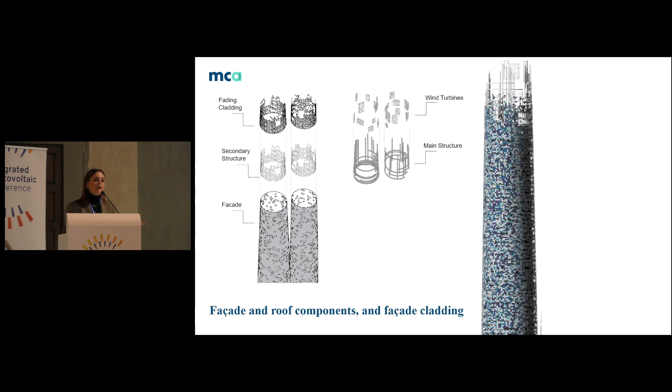And another important aspect of this particular shape of the building is that it also gives us the possibility to avoid dark areas inside the building, and also increases the performance.

This is another image where we can see also the relation with the surrounding. When we design skyscrapers and high-rise buildings, one of the main topics is related to how we can dialogue with the surrounding, with the urban space.

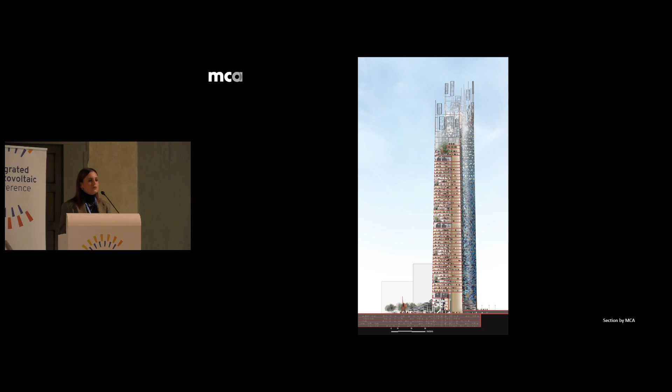This is one more detailed picture where there is also this canopy made by the same pixel as the facade, which acts as a shading device in this case, and also serves as a link between the external existing space and the indoor space of the building. So it becomes a sort of buffer zone of the building.

Moving to another place, here we are in Algeria. This is also the result of an international competition: the Post and Telecommunication Authority headquarters. We know that Algiers is a Mediterranean city facing the sea, with long summers that due to climate change are becoming even longer, and mild winters with high values of relative humidity. So the main challenge was how to control the light and the heat in the building.

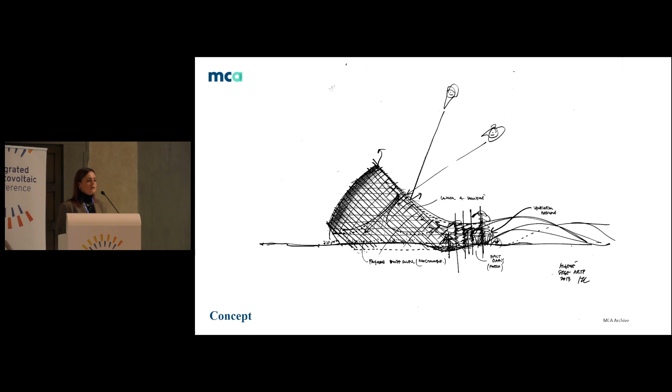So this building is a sort of dune shell, because we have this kind of shell that covers all the internal space like a mashrabiya, something very common in Islamic tradition. So there is every time a bit of a link between modernity and tradition.

The geometrical generation of this shape - when we think about the project, this is the first idea, the sketch we do during the creativity phase, but then we have to realize and make it buildable. So the building blends tradition and modernity, starting with the shape that comes from the pointed arch of Mediterranean architecture on one side, and the cutting is also related to the sun path of this latitude and place.

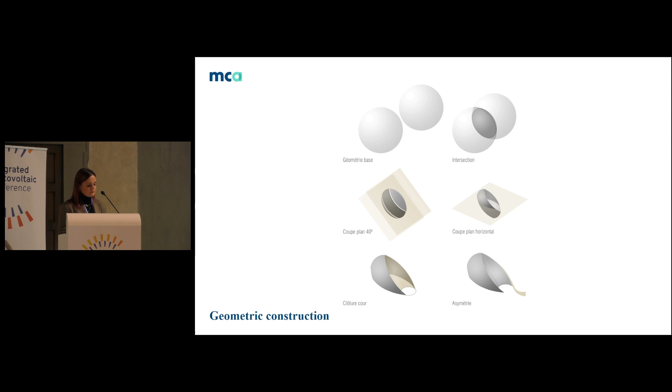In this building, the relation between architecture and technology is very important, because the entire south facade consists of a series of photovoltaic panels that not only produce energy inside the building, but also help shade the huge atrium space. We have the conference hall and offices here, so this is an important aspect.

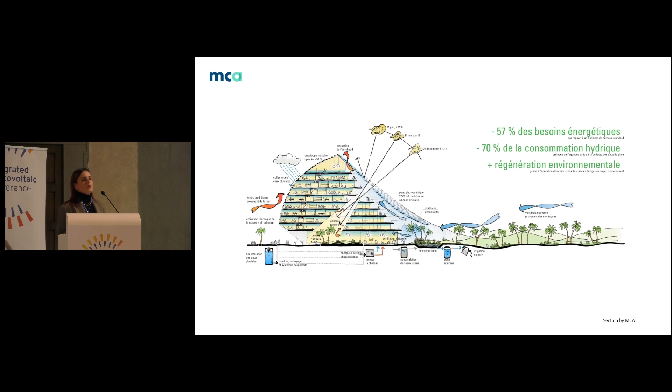Thanks to the presence of the canon lumiere, the light channel in between the building, we can allow the winter sun to come inside and also have natural light in a filtered way on the opposite side. This is an image of the main atrium where the light comes from the opposite side, so the diffuse light of this space is on the north side of the building.

This is another tool we use during the design phase: the real scale model. It's an important tool, not just software, because we are architects and we have to work with them every time. This is an important value, and since the beginning, 30 years ago, the architect worked with scale models, and now in the office we have a space with 3 people working on models - an important part of our work.

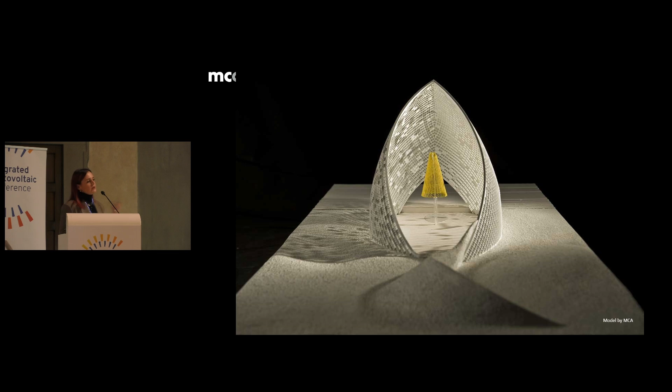In this case it was particularly important to study the relation between the shell and the light channel that comes from the south facade to the north part of the building. This is then the transposition inside the software, to really understand the relation of the indoor space and how this kind of element works inside the building.

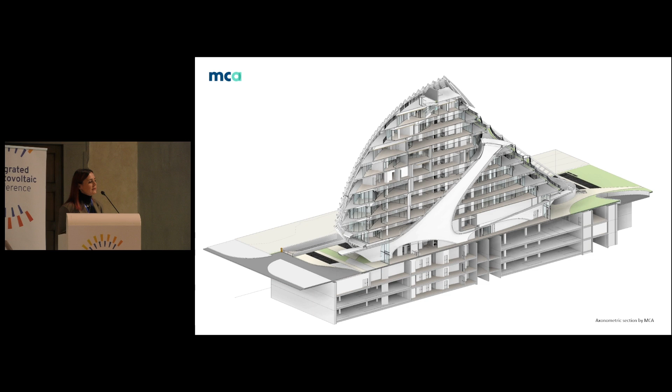This is an image of the main entrance with the huge canopy that helps protect from wind and sand in this particular part of the building. This is the last image at the end, as a result of our design.

Moving to another place, we are in Ferrara, a small city in the north of Italy, and this was the headquarters for the Regional Agency for Prevention, Environment and Energy. The request from the client was to create a sort of manifesto of their work.

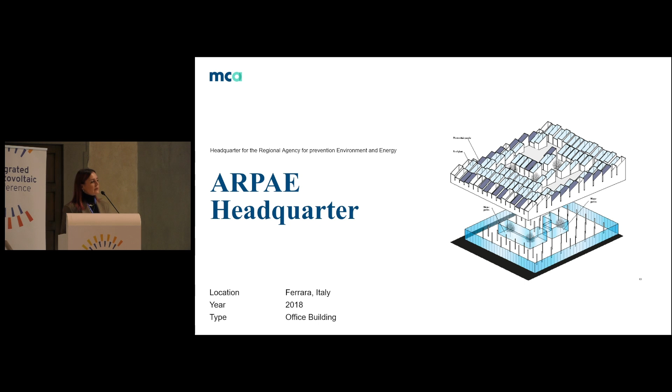It's an office building, and the concept in this case comes from a very strong inspiration told in the book by architect Mario Cucinella, 'The Future is a Journey to the Past,' which tells the story of 10 journeys made by the architect himself to different places in the world to discover vernacular architecture and understand the lesson from the past for our future.

In particular, the shape of the project is evocative of the wind chimneys of Hyderabad. Of course, we are not in Pakistan, we are just outside the city of Ferrara, but the different climate conditions between the two main seasons are very strong - a hot and humid summer and a very cold and damp winter. The main effective strategy in this kind of climate is natural ventilation, so this is the link between the two architectures: the climate condition.

Our building's roofing consists of 112 chimneys that work for different reasons: controlling light penetration inside the building, since it's an office that needs particular light conditions; improving natural ventilation as a starting point; and also producing energy for the whole building.

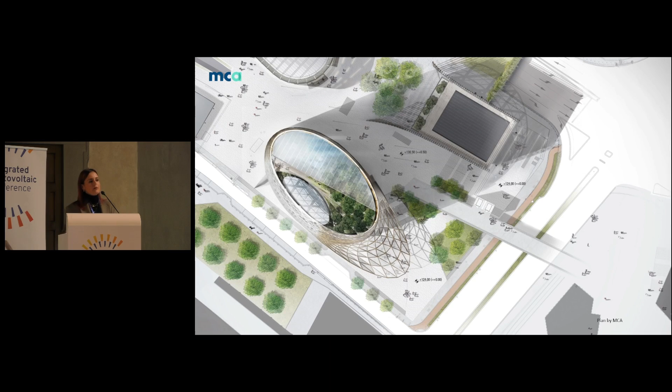So before we think about anything else, our approach is every time the same. Even if the technology and tools are evolving, before we start thinking about the active systems inside the building, we think about how to create a form that performs. So this is really the challenge for our work.

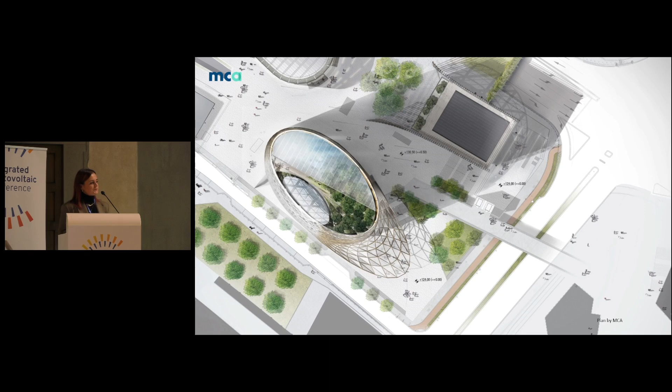In the later stage of design, we decided to put all the offices on the northern side of the building, to ensure the best quality view to the park, and also to maximize the diffuse light, which is the best for an office building.

Then, on the south side, we decided to have an empty space, but that became really an energy opportunity for this kind of tower. So this was the first step.

So this inclination is due to the urban planning constraint, but we decided to use it like an opportunity, because this is also the best inclination for the PV panels, and so for the production of energy. We said, okay, it's perfect for us - we didn't want a planar rooftop, so we used this constraint like an opportunity for the building.

So this is the main part of the building. It is not the office, but the atrium. It's a 75-meter high atrium that works like a bioclimatic device inside the building.

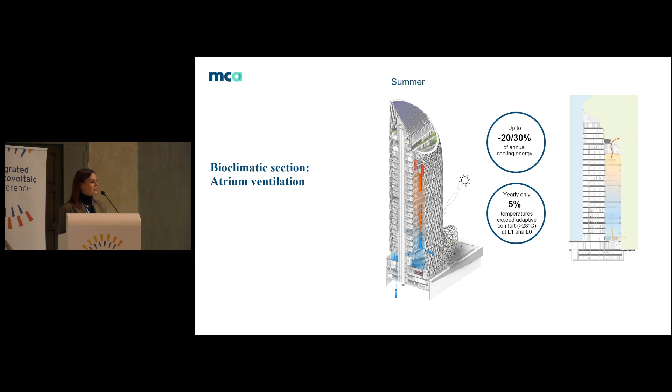In summer, it enhances the natural ventilation. The dual skin facade reduces the overheating of this space and the circulation. So the atrium, thanks also to small openings on top, enhances the natural ventilation and reducing cooling electricity. And during winter, it works in an opposite way.

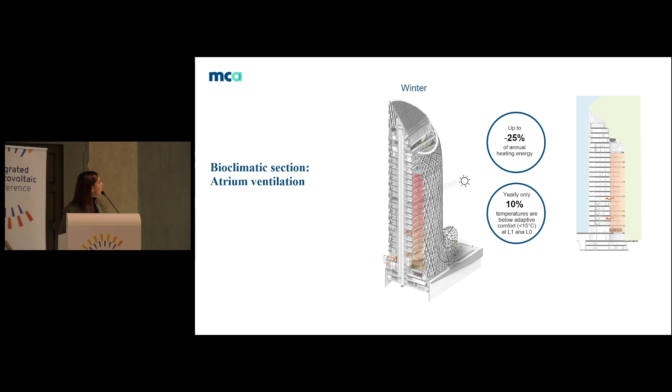So it's a greenhouse, and thanks also to the combination of the dual skin facade, which is a dynamic element for the different seasons, it stores the heat that comes from the south. So this is also an important part of this building, to reduce the energy consumption before understanding how to produce the energy that we need.

But on top of the roof, there are different plates that can be open and closed in different seasons, and also during summer they can be open. On top there are PV panels, so we can maximize the production and the orientation of this element. And during winter, this is a place where we store it.

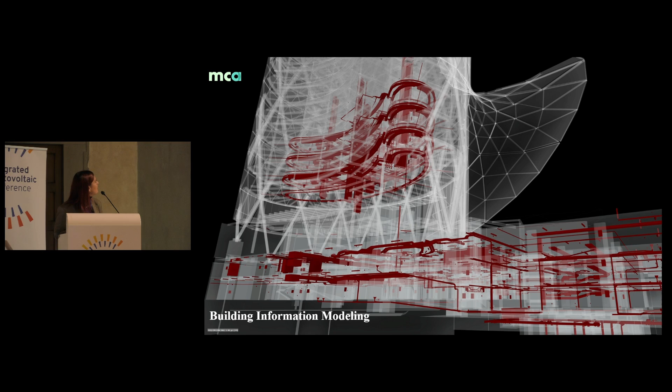So the evolution of the tools, but not the approach. The approach since the very beginning is every time the same: take care about the climate, the place where we are building or designing something, and the people that have to live there.

So this is the challenge. It's not, as I mentioned before, only an environmental challenge that we are facing now in this year, but also a cultural challenge. This is the very transition, and it's important for the architect to understand that we no longer have to draw something that is beautiful, but we have to understand what is the new paradigm of beauty.

This is a beauty that maybe is different, for sure is different from the past, but is really related to the condition, the context, the social context. This is our approach, and I hope I was clear and the intention. Thank you.

Thank you very much, Lori. I don't have to add nothing if not thanking you again. I guess the bond between beauty and architecture was really clear, and your vision and your commitment are inspiring for all of us. Thanks again for your speech, and I can hand over to the next session.

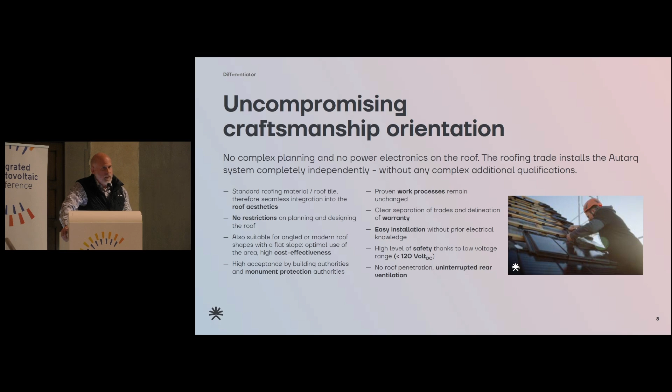So when you think of Autarq, think of a building material with a transparent PV function. What do we mean by transparent? Nobody, not a single stakeholder in the value chain, should need to consider the specifics of solar, because it's not their job and not their sphere. Neither architects, planners, nor roofers should worry about PV. That's something we as an industry have to worry about and take care of. Take the complexity out of the product and make it a building block that can be used in a mass market setup just like any other building material. That's what we feel.

That's what it looks like in a heritage building in the center of Freiburg, Germany, one of the hardest places to actually realize BIPV. And this is what we do, and that's what we feel is the electric architecture needed for BIPV.

We operate in a parallel circuit. That means we do away with all power electronics in the building envelope, on the roof or the facade. Why is that important? It's a maintenance nightmare. Talk to anyone, it'll take 15 years and then you have failure rates of X%. So what do you do? You start rebuilding. You need to get to this power electronic device and change it.

That's one element. The second element is maintenance. The technology we've devised is, in its single form factor, exchangeable as a single unit without needing to touch any adjacent unit. That's extremely important when you're talking about a building material that's supposed to be on a roof for 40 to 50 years, doing its job keeping you safe from weather - rain, hail, sun, etc. The electric generation is just a nice bonus on top.

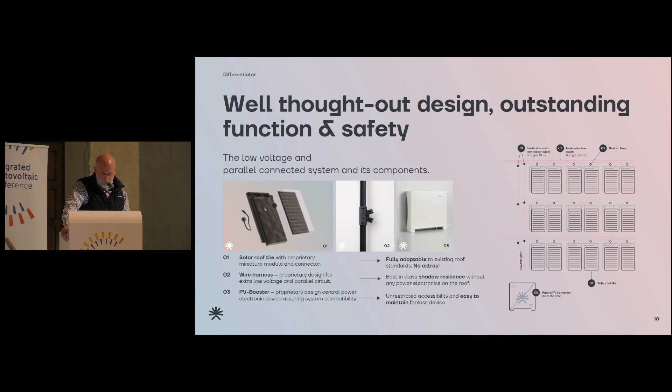So in order to do that, here's a nice example of what can be done in this form factor. I see some of you taking pictures - I'm sure we'll have the presentations available later. If you want it, just leave your details out front, we'll send it, or visit our website. Everything available, high-resolution pictures, whatever you need and wish.

So we feel what we as a BIPV industry need to be is a vertically fully integrated solution provider. We go from electrical over the module to the connector, and that's what Autarq does. We do not build a tile, we partner with the tile industry. Autarq is the Gore-Tex or the Intel of building integrated PV. We provide leading BIPV technology to building material providers, be it roof or facade, for them to have the leading technology integrated in their existing material in order to go for mass market application.

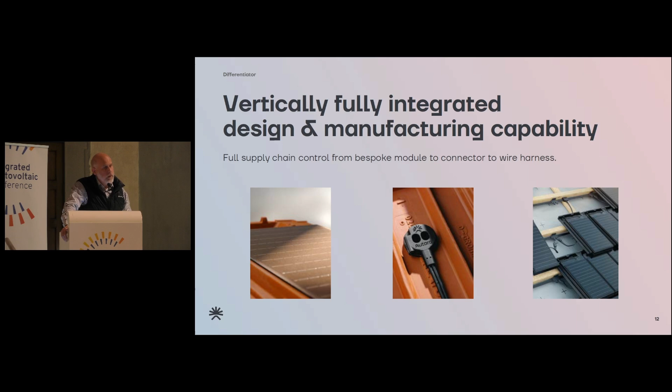Enough from my side. I hope I teased a bit and laid the ground for a fruitful and intense discussion with my peers, and look forward to the results we come to together, because that's key. We are in this together. We can achieve this only together.

I talked earlier to colleagues of ours. There's between 70 million and 100 million roofs that need to be renovated across Europe. It's not going to be done with one technology, it's not going to be done through one partner. It's going to be done through an industry, and we have to get our act together as BIPV and have a bespoke electric setup, not try to remain in hybrid. That is it from me.

Thank you, Kai. During his speech, I kept thinking, sounds like a plan. So, okay, thank you. Thank you so much.

So, I invite on the stage Markus Bachmann, CTO of 3S, Swiss Solar Solutions, working in the PV industry since 2006 with ingots, wafers, cells and modules, nowadays developing and producing BIPV. Thank you, Markus.

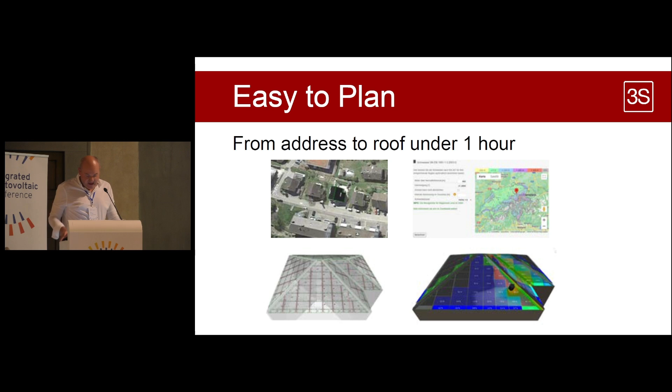First, we start with the life cycle, with the planning. We start with our software tool: you select the address, you select wind and snow situations, you get the plan, the drawings, all your load plannings, electrical wiring, and you can start really easily - in 1 hour you have your roof customized.

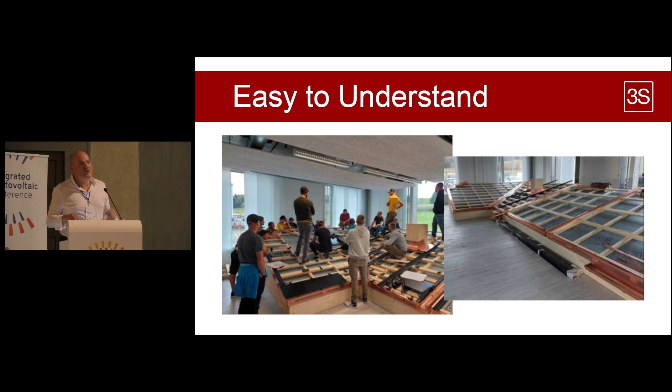The other thing is for the installers, our system is easy to understand. We have a training center, we educate people to make sure that they really understand how all the system elements work, and we are able to deploy that solution.

One of our advantages is that we are delivering our products into high-salary countries, right? So material cost is one topic, but the other topic is the installation cost, the hourly rates of all these companies. So we really must be able to move up such a building very fast.

But it's not stopping there. We talk about a life cycle, right? Also afterwards, for the maintenance, we are not just monitoring the systems - we are a PV producer since 2001, so we really understand how PV modules work.

I think we can really say that for 3S. We are comparing customer objects against the digital twin, and we can see if these objects behave properly. We have the possibility not just to monitor the success, but also to compare and check if there are deviations or specialties in this object.

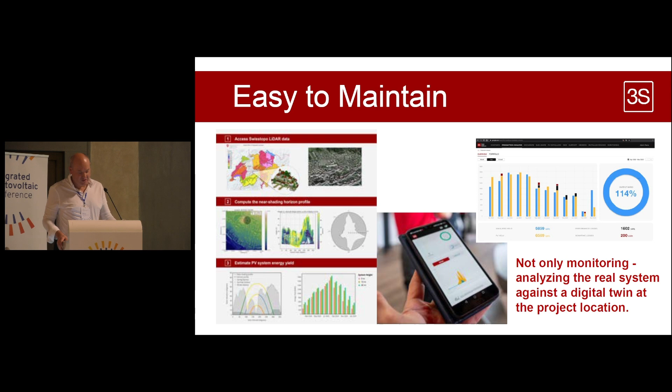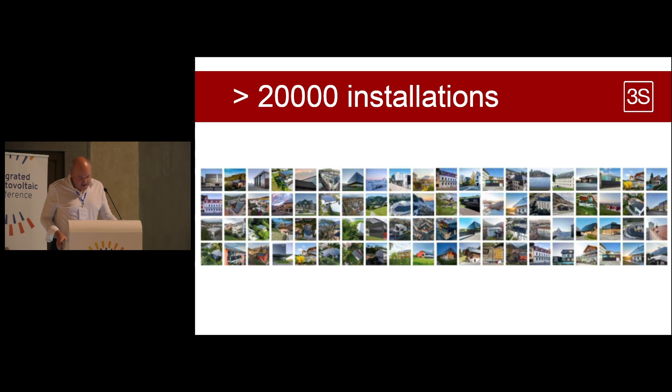I was asked for this speech if it's possible to show some of our objects - yes, I do. We have nowadays more than 20,000 installations already, with the majority in Switzerland, but a lot in Germany and Austria, and some in Luxembourg and other countries. We are just running through some of these so you see the possibilities of what is currently possible with existing BIPV systems, because you all know these special roof shapes.

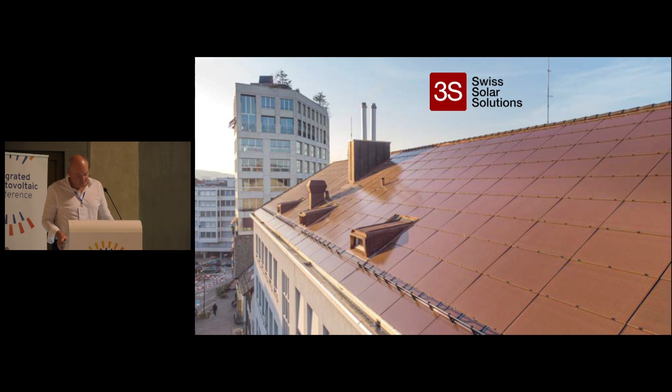Normally, on-roof systems give terrible solutions. You can go in colors for heritage-protected buildings. You can do walls, facades, even for old, not so nice buildings - it gives them a second life.

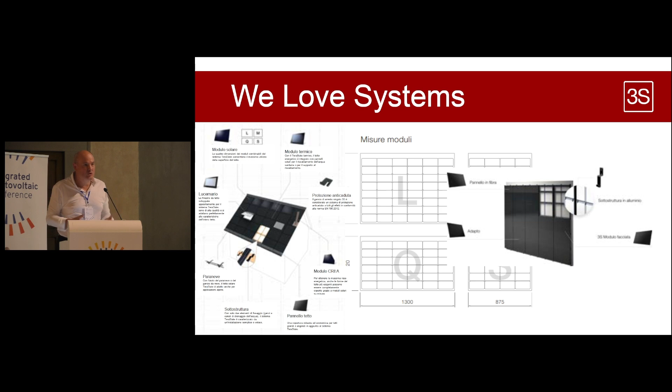And the important thing is all these buildings you've seen here come from just one single system concept. At 3S, we simply love systems. So for all these designs we follow a structure of putting things together from a set of elements, like building up Lego - put that together and it works. There's still a high level of customization possible, as you've seen, but the structural elements and how it's put together still follows a system concept.

And why do we do that? Systems allow us to deliver consistent quality and defined certifications, because we all know certifications are a nightmare in BIPV. So if you can do everything, what about your certifications? What about your fire tests? Also, installers learn the system once and can then install many different buildings.

And because we do the same thing, we are reliable for the lifetime of the product, and it's possible to have a spare part service afterwards if there are problems or changes, because if you stick with the same systems, you can replace the products. My message is: we can combine the past and the future. Already today, there's no need to wait for new or more BIPV. Just do it. Thank you.

Thank you, Markus. If you ask me personally, buildings with integrated photovoltaics are more cool, no? They look better, yeah. So, let's move on - it's time to invite to the stage Werther Cambarau, Senior Researcher and Head of PV Modules Research Group as part of the PV System Platform at Tecnalia. He is currently responsible for indoor characterization and lab testing activities, focused on the reliability and durability of PV modules. Thank you, Werther.

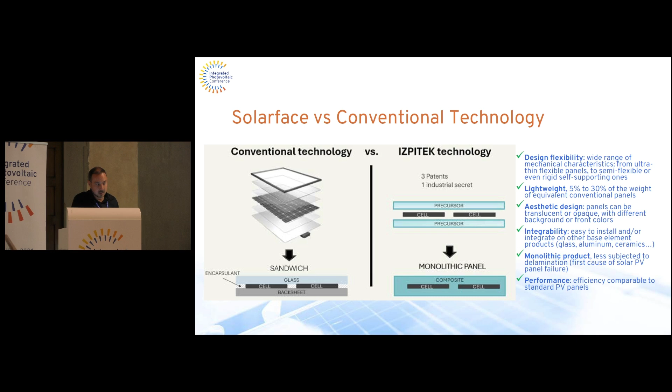So the purpose of IZPITEK products is basically to fill the gap that conventional technology cannot offer in integrating photovoltaics, offering different advantages or features, like design flexibility, the lightweight of the panels, the possibility to play with aesthetics, and also integrability, facilitating installation depending on the base elements. The fact that this is a monolithic product is also an important feature, and the performance of this panel is comparable with standard PV panels.

Of course there are a lot of challenges, but also opportunities for this technology. We know about growing needs on efficiency, ESG issues, safety requirements, which for this kind of material and technology are really strict, so it's really tough. But also general challenges like architectural consideration and public acceptance, as many colleagues said before.

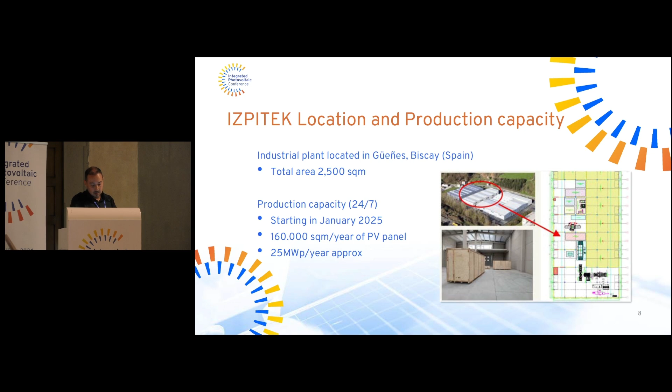And that's all from my side. I think I made it in the 8 minutes, I hope. Thank you very much.